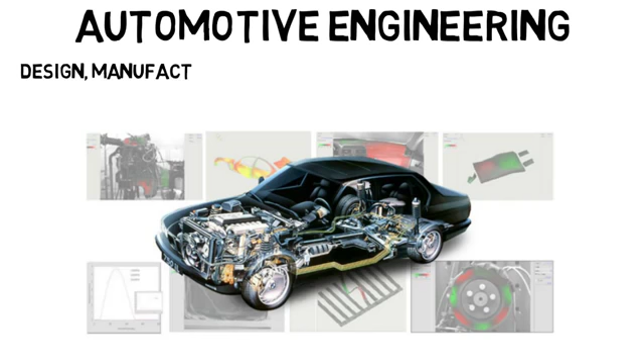Automotive engineering is about the design, manufacturing, and operation of cars, motorcycles, trucks, and other automobiles. There are a lot of subdisciplines within automotive engineering, and many things you can work on. For example, you could work on the safety aspect, assessing various crash scenarios, whether on the computer or doing actual crash testing.

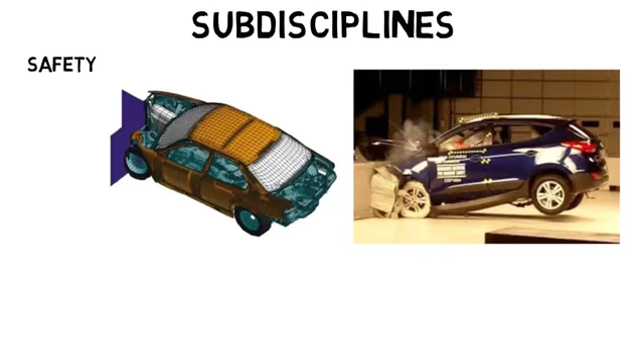Cars need to meet certain standards to protect the driver and passengers. The frame of the car has to be designed properly so that energy from a crash is absorbed or moved away from the driver. Cars are meant to crumple in an accident, as engineers design them that way to save the lives of the people inside.

If the car was extremely strong and no damage was done to it, all that energy would be transferred to the people inside. There's performance, analyzing how fast the car can accelerate, how quickly it can come to a complete stop, which is important, and more.

There's vehicle dynamics, looking at things like braking, handling, and steering, and how the vehicle will respond. The engineer who works on this would analyze or design the braking, tires and wheels, suspension, could work on the frame as well, and more.

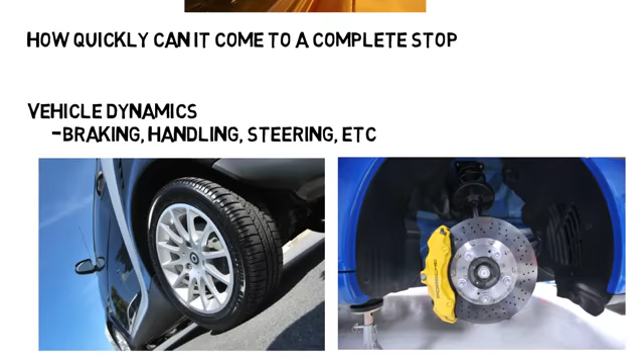There's fuel economy, where you look at fuel efficiency in miles per gallon and test car emissions such as hydrocarbons, carbon monoxide, carbon dioxide, and so on. But of course this wouldn't be the case for electric vehicles.

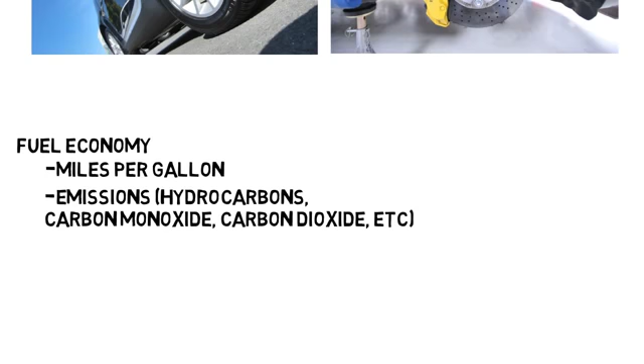There's shift quality, where you focus more on the transmission, the durability of the car, electronics, and much more. Overall, just note there are many components to a vehicle. Common jobs would be designing on the computer, testing, working with a physical vehicle, or even manufacturing, where you help with making the vehicle and its components.

Now when it comes to college, automotive engineering is rarely offered as a major, at least for undergrad. The most common major to go into is mechanical engineering, and then you'd pursue careers in the automotive industry, or get your master's and even PhD in automotive engineering.

But that's not the only option if you want to work on cars. Materials engineers can work on cars, electrical engineers can work on cars, especially with electric cars becoming a thing. Computer scientists are even needed for self-driving cars to write the programs for the autopilot, as an example. And there's even mechatronics, which may be its own major depending on your school, or just a subfield of mechanical engineering, but this can lead you to working on car control systems and similar aspects.

And these are just to name a few. So you can work on cars through various majors, but mechanical is just the most common one people think of, and it also depends on which aspect of the vehicle you want to work on.

Now a huge area of research you probably all know of is self-driving cars. Companies like Tesla, Uber, Google, Toyota, Ford, General Motors, and more are all aiming to get self-driving cars out on the road. We do have self-driving cars right now, but there are restrictions to them, and at the moment we're still waiting for a fully autonomous vehicle available to consumers.

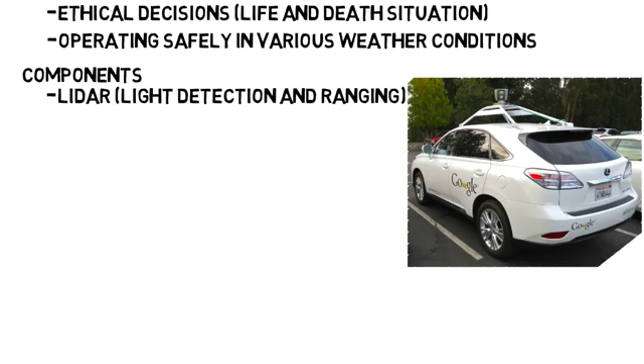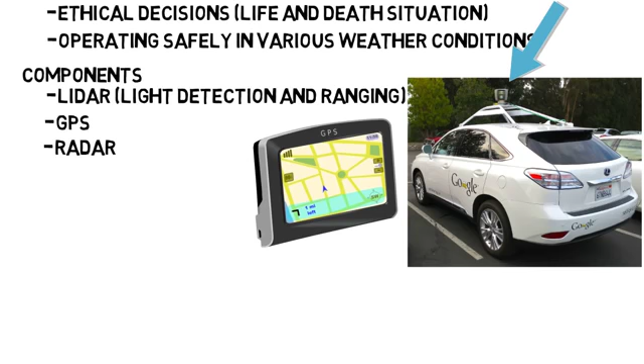There's GPS, which the car uses to navigate to its destination and so it knows where you are. There's the radar system, also used to map out the surroundings, but using lower frequency waves than light, or what LiDAR uses. And this has its advantages—as one example, LiDAR will not work with heavy fog, whereas radar will. And then there's cameras, which read the road and surroundings as well, but can also read traffic lights.

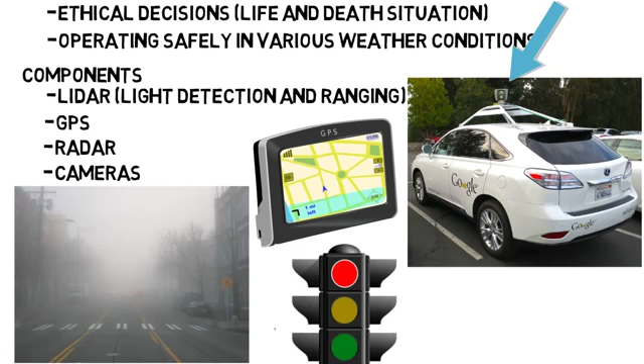And research is going into putting these together with even more components to make a safe self-driving car. But even though self-driving cars seem to be the main thing happening, other aspects of cars are also trying to be optimized.

Take the new Audi A8 suspension. This new suspension system incorporates an electric motor for each individual wheel. There's a camera on the front that reads the road and detects bumps so that the air suspension can coincide with those bumps, and with those precise reactions, you can nearly eliminate vibrations.

Working with the camera and transmission of data could be worked on by an electrical or maybe computer engineer, but the suspension system itself and doing tests on vibration would be something a mechanical engineer would do.

There's research going on materials that aim to make lighter but safer cars, and this may involve looking at different types of metals that have different properties like varying strength and density. A lot of the metals in cars today did not exist just 15 years ago, and we are still continuing to make advancements in this area.

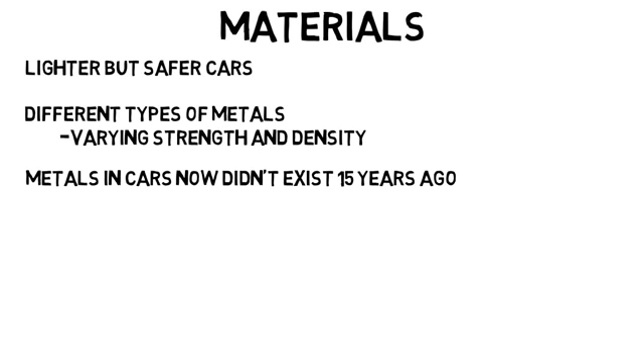Now, just to show again how much there is to work on, I found a Forbes article I linked below titled, 'What Will Mechanical Engineers Do After Most Cars Go Electric?' Which is a fair question because electric cars don't have an internal combustion engine, so are mechanical engineers needed? Well, of course they are.

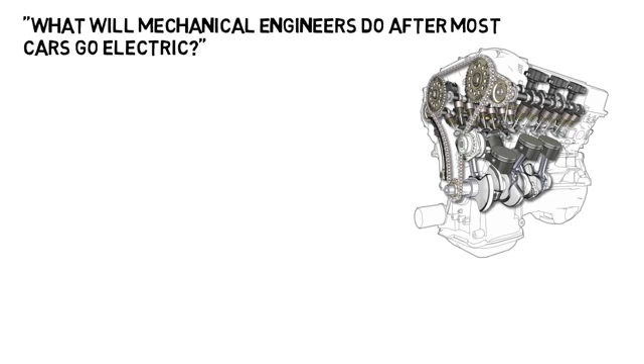Even though mechanical engineers do work on engines, most of them work on other stuff. Think about what a car really has: the airbag, the trunk mechanism, the suspension, shock absorbers, the frame of the car, the windshield, and even the windshield wipers. Everything that a car has, someone, and usually multiple people, have to work on, design, test, and manufacture.

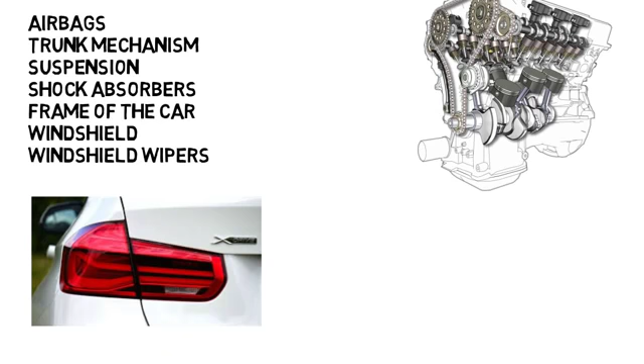The article even shows the detail when they say how the plastic taillight cover had to be made accurately and economically so that it could fit the car. And another engineer had to design the machine that makes that taillight. There's so much more detail than you may think about all the things that we use. So yes, mechanical engineers are of course still needed.

Now when it comes to companies you want to work at, you may think of typical ones like Honda, Toyota, Ford, Tesla, and so on. But there are also suppliers for these companies, and I saw multiple articles state that you might even do more of the cool design work at places you probably haven't heard of.

For example, take Honda. Huge company that I'm sure everyone watching knows of. But do you think every single part of a Honda is made by them at their plants? Because they actually are not. Many other companies help with certain parts, and I'm sure most people haven't heard of the majority of these companies.

According to Investopedia, AGC Automotive supplies Honda's windshields, Takata supplies their airbags, Borg-Warner supplies the automatic transmission systems, Automatic Spring Products supplies the seat components, and there are more. So even if you don't land the job at Honda or Toyota, just realize how many more companies there are that you can work at.

Now something like windshields may not sound very exciting, but if you go to AGC Automotive's website, the company that supplies their windshields, and look at their products, you'll see a lot of things. Things like heads-up displays on windshields, which display dashboard information on the windshield so drivers can stay focused on the road. There's high insulating glass for heat transfer optimization to maximize comfort.

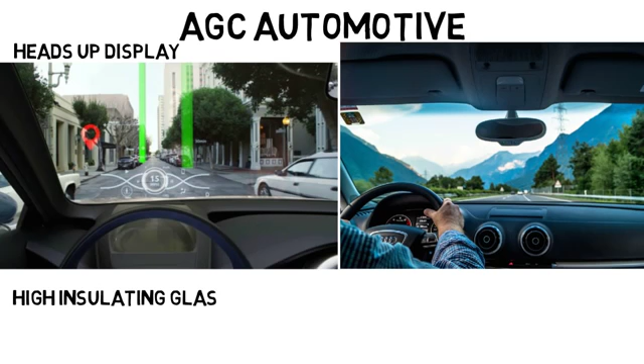They're trying to make lighter windshields to help improve the car's MPG by reducing weight. And they're even working on glass where, with the press of a button, you can control how much light and heat comes in, which helps reduce the need for AC.

So when people say they want to work on cars, just realize there's way more to it than you may think. You may help design the overall concept of a new vehicle, but you might help design the windshields, the suspension, the frame of the car, and various other specific aspects of these vehicles.

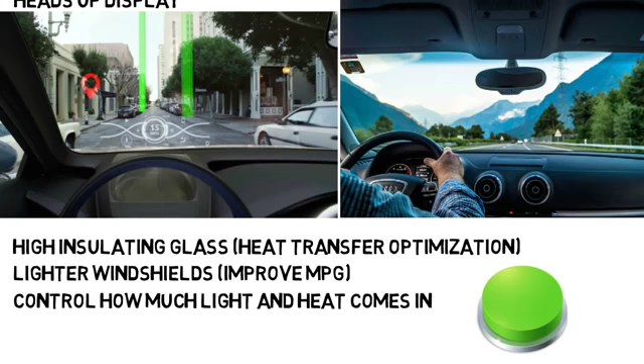In college, you want to make sure you also get involved in automotive projects. Look into joining the Society of Automotive Engineers, or SAE, which your school might offer. Then you'll be updated on competitions you can participate in.

There's also an electric vehicle competition done by this organization. You'll work with a team, get hands-on experience, and you have a great thing to put on your resume.